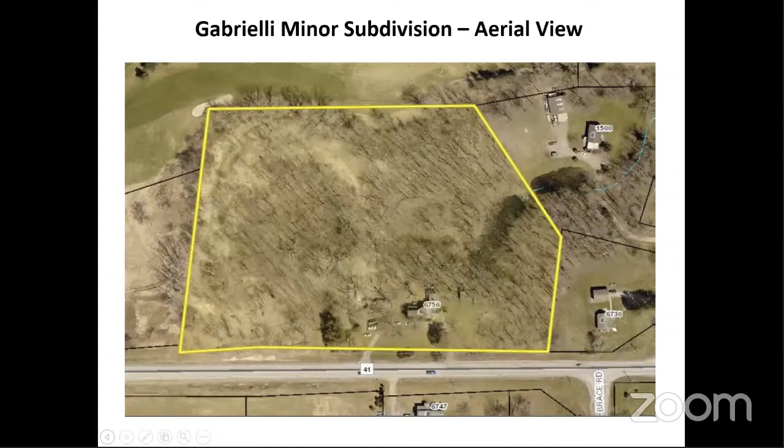But there is one house on it already, right? Well, that's not going to change. But as far as he was asking about an entryway, right, to the property? Yes, he was. Okay, and there actually is a temporary one.

We recently had trees harvested off the property, and to the left of those bushes, or whatever that is, to the left of the circle driveway, a little to the left right there, we did put a little driveway there so that they could bring the machines back in and around the backside of the house. So there is already a temporary, or it could be a permanent, little driveway there. There's a pipe that goes across for drainage, and there's gravel, a couple loads of gravel.

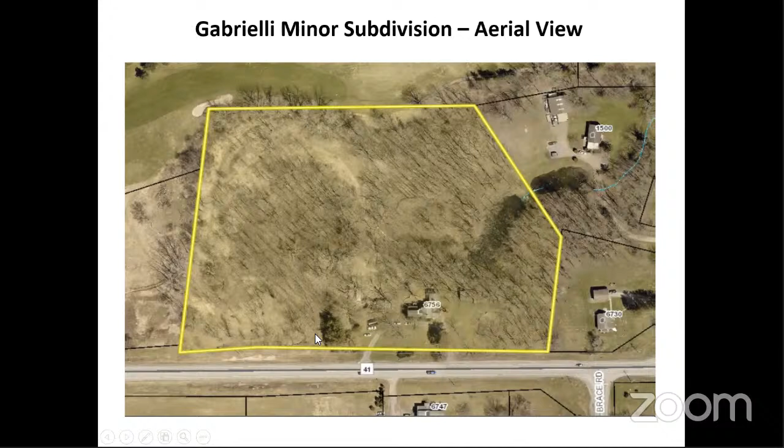But that can all change depending on what whoever buys the land decides to do with it, they'll just change that. They'll have to come back to us and show us what they want to do. I think so, okay. Scott, anything else? No, I don't have anything. I thought we should look at it the same way we've looked at the other subdivisions, that's all. Okay, thank you.

The typos, is there going to be a note of that, so that BME... I don't have it in front of me, so I'm not sure what these typos are. Well, it says the total is 10.02. Oh, okay, and they just did 6 and 4, right? Yes, so we just have to modify that. Is that the only issue?

No, in your subdivision notes under total project site, you've got 10 acres, lot 1, 8.39, lot 2, 12.068. Those are the acres numbers. Oh yeah, they really screwed that up. Yeah, I think what happened is we did a few changes and they probably just didn't update that.

Is anybody here from BME? No, it's just me, I'm representing them too. I'll relay that information to them. All right. Anything else, Scott? No, I don't have anything else. Okay, thank you. Joe Logan? No comments, I don't have a problem with this application. Okay.

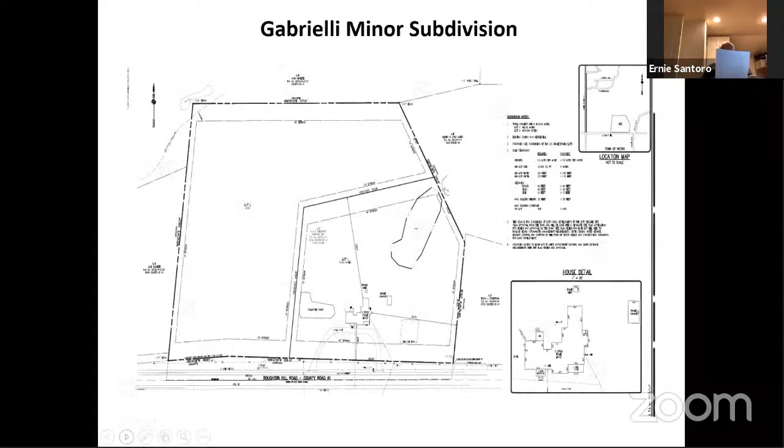All right, the next one is the Quatela Office Building sign, 11 SP 2021, 7255 State Route 96, zoned commercial/light industrial, tax map number 15.00-1-1, 2.100. Owner is Rhino 96 LLC. Applicant is requesting approval to install 2 LED facelit flush mounted signs to the north and west elevation side of the building.

Anybody here for this one? Yeah, I'm here. This is Dr. Quatela speaking. And also Mr. Bonanno, who designed the sign and is the sign installer, is also on the call. Okay, you've got it up on the screen, this is what it's going to look like.

North and west, east, west. West, yeah. It was in the packet, so it's familiar to the board members. Do you want to say anything more than that this is what we want to do?

I remember when this building was approved initially, there was some conversation about the signage, because you didn't know what you wanted to do at that time. Right, so here we are. But if you want to say anything else, say it. You can say it later too, but I'll call on the board to ask any questions they might have.

Michael, do you have anything to add? That's essentially what we'd like to do, but... This is Mike, I have no further comments.

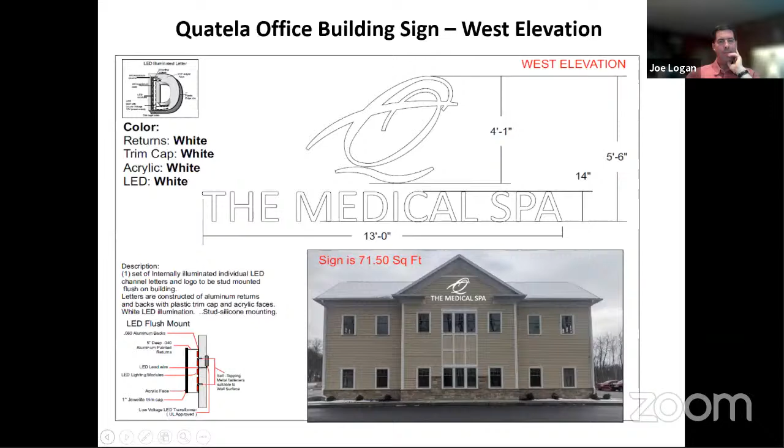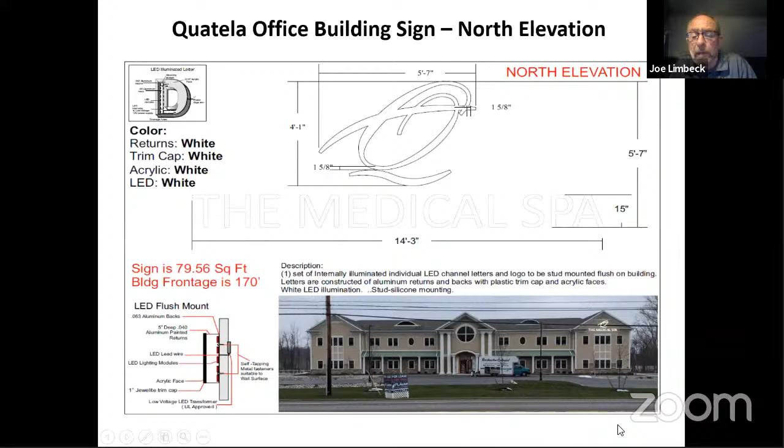It stated in the resolution, Joe, that it was code compliant. And if I can second guess folks, I think coming down Route 96, it would probably help motorists find the address a little bit. Well, it would, but if they wanted to have a pedestal sign in addition to this, then that starts to add more signage to the site, and that's where we get a little sticky.

So if you're going to have multiple tenants and you want to direct them to the main entrance and then go left to one tenant and right to the other... I see what you're saying. So, if there's no prospective future signage on the site other than on the building, I could go along with it. But I need to make sure we are looking at the prospect of other signage and where it would be. May I speak? Sure, of course.

I respect what you just said. I just, without knowing exactly what the tenants... prior to COVID I had kind of a tenant outlay, and then COVID kind of changed the makeup of tenants. So without knowing exactly what we're doing, I can't speak to what future signage would be. I can tell you though, that when you drive towards Victor, this building just comes up on you really quick. There's no, it's like you can pass it unless you're making a hard right with your vision to look.

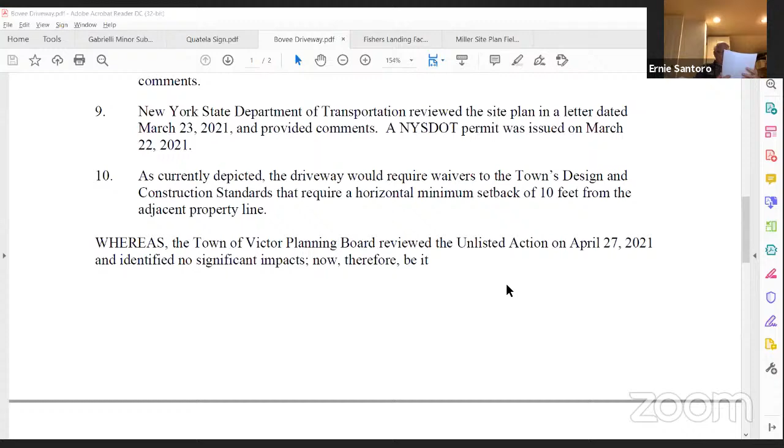To the Bovee driveway, 1550 State Route 444. Today's date, April 27, 2021, application number 06 SP 2021. Whereas the planning board made the following findings of fact, and there are 10. Whereas the Town of Victor Planning Board reviewed the unlisted action on April 27, 2021, and identified no significant impacts. Now, therefore, we have resolved that the project, Bovee Driveway, will not have a significant impact on the environment, and that a negative declaration be prepared.

And be it further resolved that the planning board waives the town's design and construction standards to allow a horizontal minimum setback of less than 10 feet from the adjacent property line. And be it further resolved that the application of Chris Bovee, site plan entitled Bovee Driveway dated March 8, 2021, received by the planning board March 8, 2021, planning board application number 06 SP 2021, be approved with the following conditions.

Conditions to be addressed prior to the chairman's signature on the site plan. 1, that no final signatures will be given on the plans until all legal and engineering fees have been paid as per fee reimbursement local law adopted November 25, 1996. 2, that requirements of the New York State Department of Transportation permit dated March 22, 2021 be adhered to. And be it further resolved that the planning board secretary distribute the planning board's approval letter.

Have a motion on this? I'll move. Al moves. Second. I'll second. Okay, Joe seconds. All in favor? Aye. Any opposed? Okay, 5-0. 4-1.

4-1. Oh, I'm sorry, Scott. Are you a no? That's okay. Sorry, I didn't hear you or see you. Are you a no? No? I'm a no, yeah. All right, that's 4-1. Okay, there you go. I don't know if Mr. Bovee is listening in, but that's what just happened.

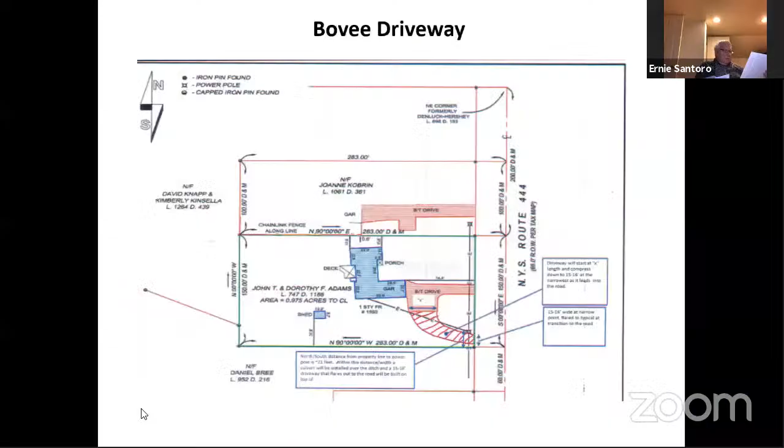All right, the next one. Fisher's Landing facade modification, and the public hearing on this one is still open as well. It's 08 SP 2021, 7383-7387 State Route 96, zone commercial, tax map number 15.00-2-80.000. Owner is the DeMarco Group.

What? What's going on? Are we also? Susie, can you mute that? Where's it coming from? Trying to figure out who it's coming from. I can't tell, otherwise I would.

Okay. Applicant is requesting approval to renovate the north facade of the existing 23,000 square foot building, including removal of a portion of the seam metal roof and conversion of the center elements of a gable end appearance.

Okay, Paul, you were here last time. I think we saw what you wanted to do. We do have some comments before we go to you. Wes, you had some comments with regard to this? Well, I did see our architectural consultant's comments. Mark Kukufka from Labella provided an email, and I believe it's in your file.

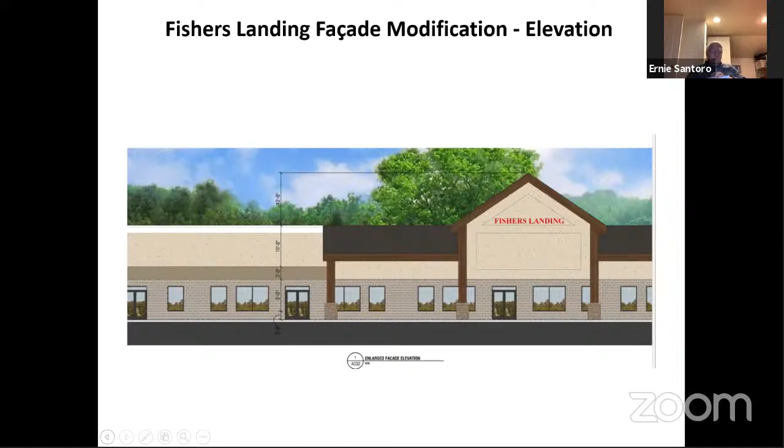Yes, it is. And he was indicating that the green standing seam roof is generally more compliant with the Route 96 251 overlay design guidelines versus the elimination of that and having that abrupt change from the vertical facade to the horizontal roof. So he did indicate that there were multiple styles and colors of standing seam roofs if they wanted to change the green color.

You know, and it's just basic, it's Mark Kukufka's observation, based on comparing this design with the design objectives of the corridor. Certainly, Mark was feeling that the center portion of the new facade really does kind of match what the design intent of the corridor is. But then the wings on the left and right, it appears that some form of standing seam roof would be more appropriate and meet the objectives. But that's all we've got for you.

Okay, Paul, have you seen that? You still there? Sorry, I'm here. Yeah, thanks, Ernie. I have seen that, and I actually responded to Mark's prior comments on the original elevation that we submitted in a written correspondence back through the planning department, where we actually lowered the left and right side of that center element to give some vertical articulation. That's what I shared with the board last time.

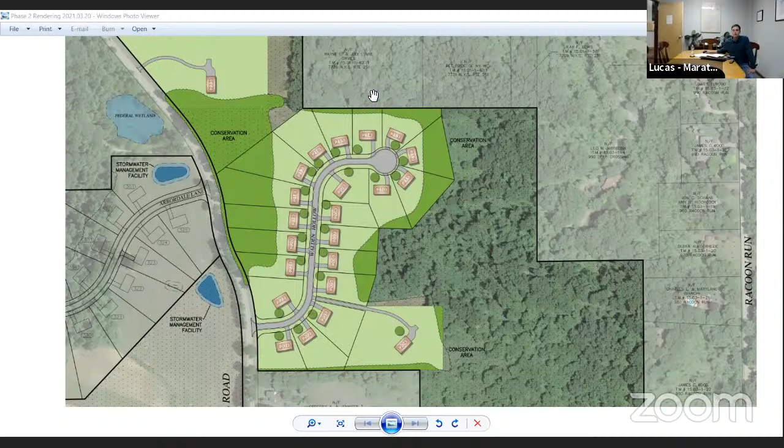The second waiver that we're asking for is similar to one we asked for in phase one of this project. That's for a waiver from the conservation easement requirements for the markers. So I'll bring up a figure that I put together. This shows the dots as the conservation markers, as required per the town construction standards.

As is typical, sometimes there are these interim markers that don't provide much benefit. They're sort of floating out in the middle of the buffer area. This is a slope, so these are 30 feet up above the lots, and they're set back into the wood line, selecting locations that will be useful in identifying the boundary of the conservation easement. That's essentially what I'm trying to do here by laying out the black dots.

The red dots would be markers we're requesting relief from, sort of interim markers required per the letter of the standards, but that's something we'd like relief from, because we think the black markers are sufficient. So that's what I wanted to lay out. If there's any questions or discussion about these items, we'll be happy to go there.

Well, I have a question. First of all, let's go to Wes, because he wrote a substantial letter concerning these things. So Wes, why don't you do that, and then we'll let the board chime in.

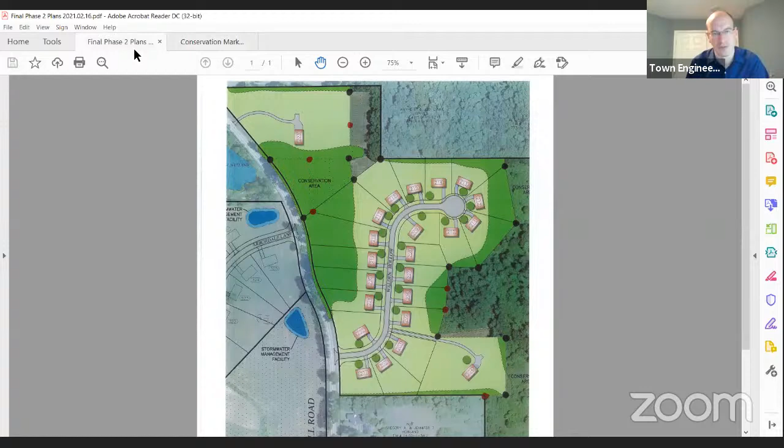So one of the things the developer and project sponsor has offered to do to resolve that sight distance issue that his proposed roadways create is to cut back that existing slope.

Now, while I do recognize that Lucas did indicate the existing slope there is steeper than their proposed one-on-one slope, if I characterize that correctly, we know there's some existing vegetation on the existing slope that helps solidify and hold those soils together. My understanding is that if we cut away that vegetation—and I think it might even be alluded to a bit in their geotechnical letter—it indicates those pieces of vegetation help hold that soil together. Sometimes it takes a long time to reestablish that kind of stability if that vegetation is removed.

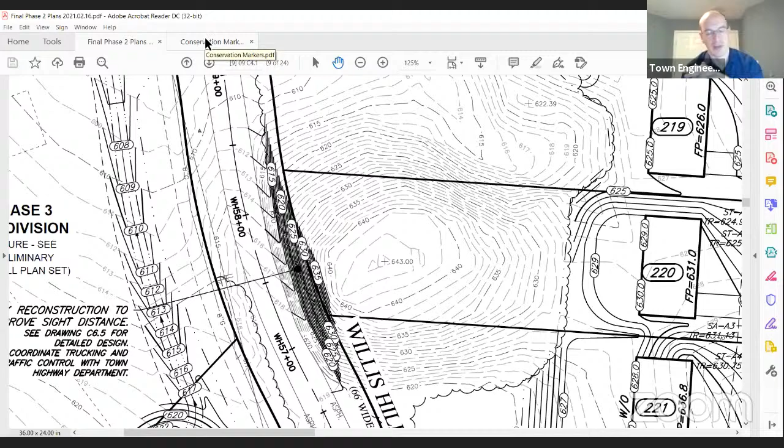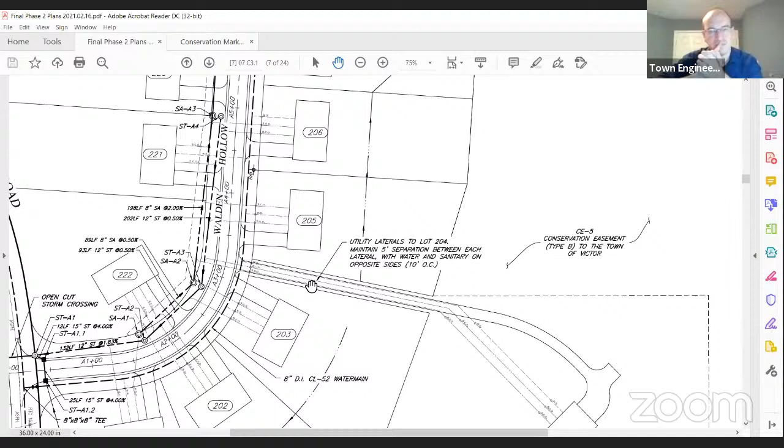Although it is identified on there as on center, and that should probably be, at least that's what my understanding is of that notation. And then the other one is the same lot 204, which I drafted a potential waiver for. Let me see if I can find it.

Wes, just to speak to that while you're pulling that up, we've modified this lateral layout to address that comment. The rest of your comments we're comfortable addressing, and that was one of them that was also echoed by the water authority. They wanted those redistributed. So that comment is addressed, but we're not looking for a waiver there.

All right, perfect. So the other one, and maybe you can speak to this too, Lucas, it's very possible that I had missed some correspondence. But I did take a look at the memo from the fire marshal, and I noted that in section 1, for example, you obtained a waiver for not requiring that 30-foot by 10-foot pull off for the driveway. For this section, it would be with lot 204. Do you need a waiver for that as well here?

If that waiver doesn't apply to this approval, then yes. I apologize, I didn't understand that to be a waiver, but me and Robert Graham and Sean McAdoo talked, and these driveways are to them the same as the driveways that were approved in phase 1. So these pullover lanes are less critical to them than the turnaround that we designed up at the apron. Okay. All right. Very good.

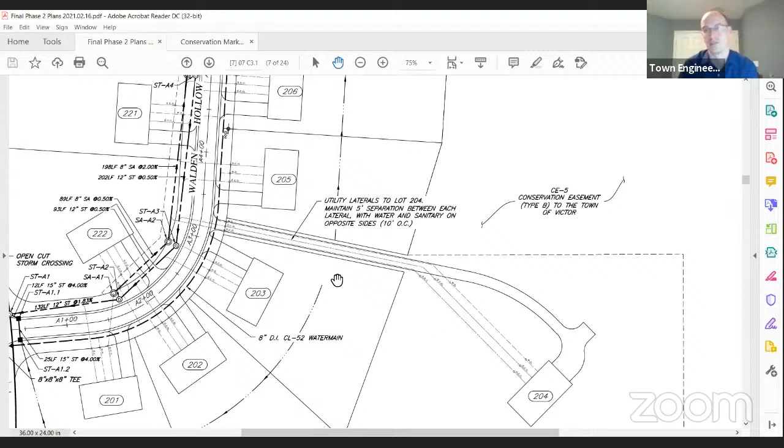Maybe I will go back to that slope on the roadway. One of the concerns that we have is if that slope were to fail, either during construction or several years down the road, it could be more than just a headache for the town to clean up if it slumps off into the roadway. It could be a health and safety issue if someone's driving by during an unfortunate event and the slope fails. It could potentially involve injury, possibly death. That's probably a very extreme circumstance, but we want to protect the town's interest and make sure it's done in a safe manner, and that this resolves the sight distance issue as well.

So, may I say, Wes, I thank you for that. But we should remember that we're backing the toe of the slope up approximately 10 feet away from the road edge, and currently it is approximately 0 feet away from the road edge. So clearly the safety margin is considerably greater than it is now. And plus, I do appreciate that there is vegetation established there, but recall that this slope has to be at least 75 years old, if not older. And there's no indication that this slope has been sloughing into the roadway over those 75 years. And I'm sure those trees weren't there when it was initially established.

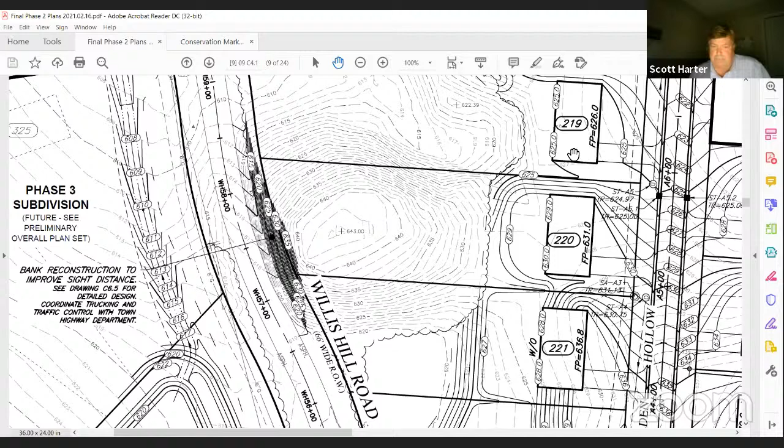Still here. Okay, I guess my comment would be the 1-on-2 seems like the right answer. I'm glad that they are okay with doing it. I'm glad the geotech from LaBella thinks it's a good solution. I think problem solved. The only question I had for Lucas was regarding the landscaping plan. I understand that you don't want to do landscaping around new homes to be built. Is there any landscaping proposed for the stormwater pond areas as part of the design of the ponds? There's no, these are infiltration basins, so there's no landscaping proposed within them. Okay.

That's all I have. Okay, Angelina? Anything? Well, I agree with Scott's comments. I think the one vertical and two horizontal is a good resolution to that, because that was concerning, but I'm much more comfortable now. Well, you and I drive that way a lot of times, so. Yep, a lot, and I think that's going to be a nice enhancement to that fairly dangerous situation there. Yep.

Okay, Joe Limbeck? No, I agree with Alan and Scott. Okay, very good. Joe Logan? I appreciated Tom's comments and I agree with them. I could not agree with the one-on-one slope at all. I've seen slopes fail right down the street from my house, right into the middle of Briar Road. So, steep slopes, so I'd much rather see this one-on-two. So that's all I got.

Okay, all right, to answer the question of the applicant, we do not have a resolution tonight. Ernie, if I could interrupt, sure. I prepared one with Kim, we just didn't distribute it to the board. And we're happy to share that on the screen and review it. Why don't you do that and talk through it? Okay. I did just send it to everyone's email.

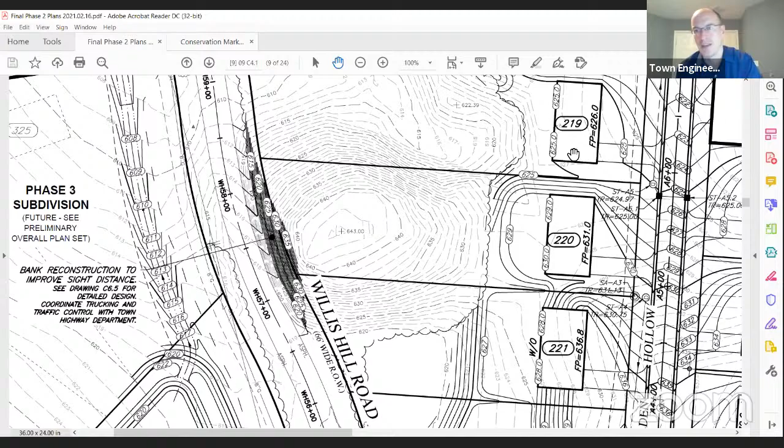Okay, so they could. And just to familiarize, there's some color text in this draft document, this draft resolution. And that colored text relates to the waivers that we've been talking about, right? And some of them, I think one of them, Lucas indicated they're not seeking because they resolved the issue with the lateral separation, so we're okay there. And we'll review those. And then there's also one condition that I need to add to the end of the resolution that we discussed at the last meeting. But, can you put it up on the screen? Yep, I can put it up on the screen. I'm going to share my screen here in a second.

All right. Can you, with the exception of Ernie, who's on the small screen phone, can folks read this? Yes, okay, I can read it. Oh, great. All right, good, Ernie.

All right, let's take a review here. Whereas the planning board made the following findings of fact: the final subdivision application for a cluster subdivision was received on or about February 17th, 2021 by the secretary of the planning board from Jeff Smith, Woodstone Custom Homes, the applicant for Willis Hill Estates Phase 2, formerly known as Anderson subdivision, requesting to subdivide approximately 55.6 acres into 23 residential building lots.

This application is the third step in a major subdivision review process and follows the sketch plan for the Anderson subdivision, which was deemed complete by resolution of the planning board on March 10th, 2020. This application also follows the SEQR negative declaration as well as conditional preliminary overall subdivision approval issued by the planning board on November 10th, 2020 for the Anderson subdivision.

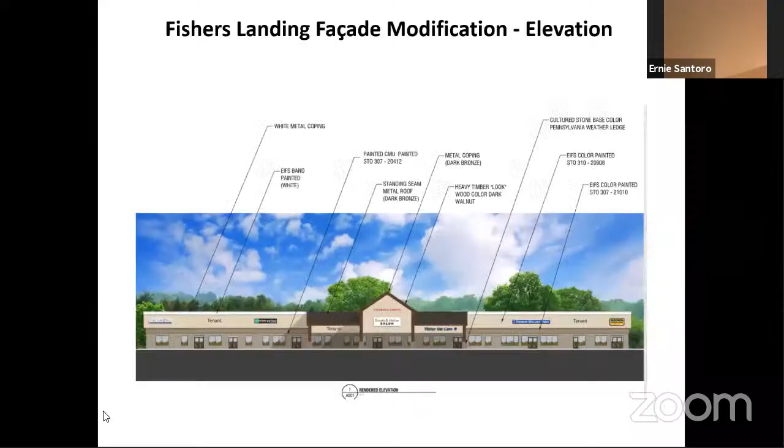All right, our last item is the Miller Site Plan Field Change, 7835 North Road, 05 FC 2021, zoned residential 2. Owner is Bethany Miller. Applicant is requesting a field change for a waiver to the design and construction standards to allow roof drainage to splash block instead of draining into a dry well. Per town design and construction standards, 2.7.9.3, dry wells shall be used for disposing of roof drainage where storm sewers are not available and soil conditions are suitable.

Anybody here for this one? This is Mike Green, I'm here to speak to any questions that the board may have. Okay, I don't know if they've had it.

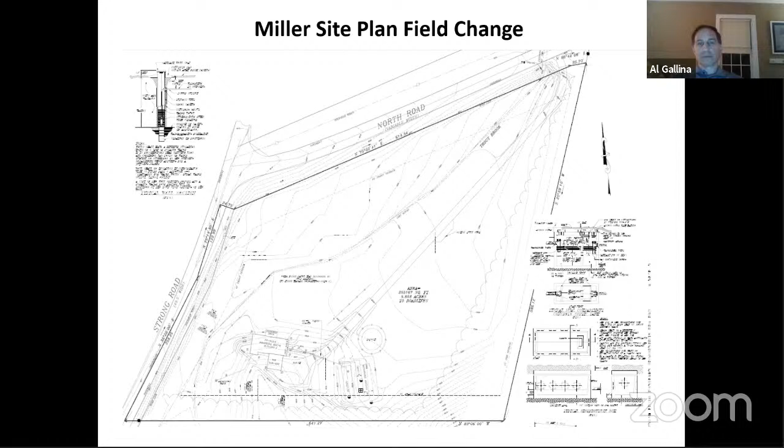Anybody on the board have any questions, Mr. Green? Al, anything? No questions. Joe Limbeck? No, if it's not in the MS4 permit area, I can't see where there'd be a requirement, so I'm fine. Joe Logan? No, I don't have an issue with that. Scott Harder? It's reasonable. Looks that way to me too.

Okay, we have a motion to approve. So moved, Joe Logan. Second? Second, looks like Al. All in favor? Aye. Any opposed? Okay, the waiver is granted. Thanks, board. You're welcome. Good night.